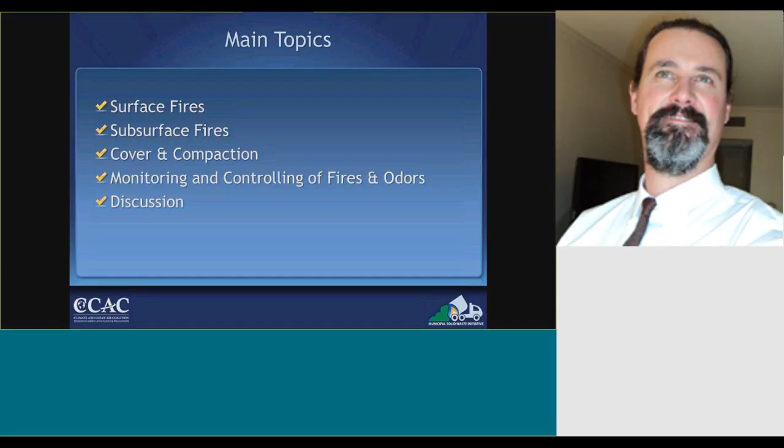With my audience in mind, most of you guys from India, the home of yoga, I believe you guys should know, like what the yogis know, that when you talk about fire, the first thing that might come to mind is breath. As we breathe in oxygen, we oxidize it, and that helps our bodies continue to energize and respirate and sustain life. So with that, we could actually start this meeting with a deep breath in and synchronize our breath halfway across the world, which is about as far as anyone can get or hope to get. So thank you guys, and I hope you enjoy our presentation. I believe you can chat questions as they arise, and Nimmi will moderate those, and we can have hopefully a fruitful discussion.

So let's start with the basics here. The original idea was the fire triangle needing three things: oxygen, heat, and fuel. In newer fire science, they teach the fire tetrahedron, which adds the additional information of the chain reaction. What that adds is the idea that if you have the main three elements, oxygen, heat, and fuel, which would normally sustain a fire, you also need the interaction between those three. So if, for example, the fuel was covered with a fire retardant, it would actually prevent the fire reaction even though heat and oxygen were present.

Even more basic than that, we see the picture of a fire on the left, and this is the shape we call these typically, like a teepee fire. But that shape should also remind you of something else, and that something else is the solid waste facility pyramid or large mound. You could think of the sticks as a potential fuel source inside that mound, and the space between the sticks as room for oxygen. So once you add heat, you have all the elements necessary for a good, fast, rapid oxidation, also known as a fire.

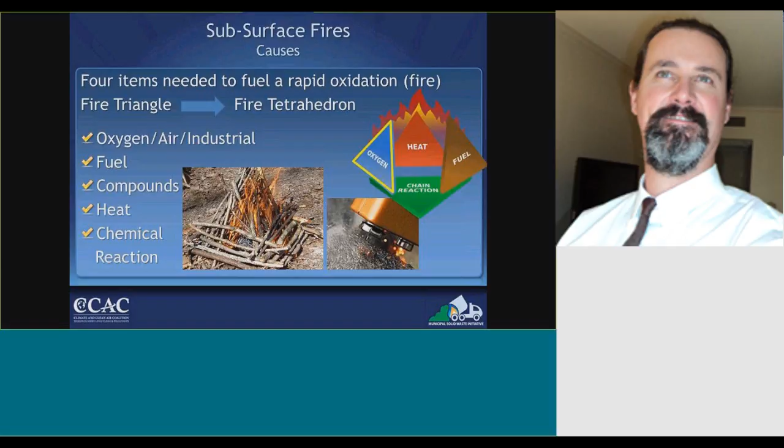Now, what I want you to focus in on is one part of the fire tetrahedron - the main one that we can control is actually oxygen, because fuel is always going to be there. The chain reaction, or potential for the chain reaction, is always going to be there, and the heat will always be there. It's the oxygen portion that we can affect through proper solid waste management.

So there are 2 types of landfill fires, the subsurface and the surface. The subsurface is happening inside the fill and often not noticed at all. But in this case, in the picture on the left, you see physical evidence of combustion. We call that subsurface oxidation, typically out here in the West, also known as SSO. On the right, we have a surface fire.

You can see that potentially one or more of the pieces of refuse that made it to the facility most likely was the source of ignition, or the original heat, and it was enough to start the fire on the surface.

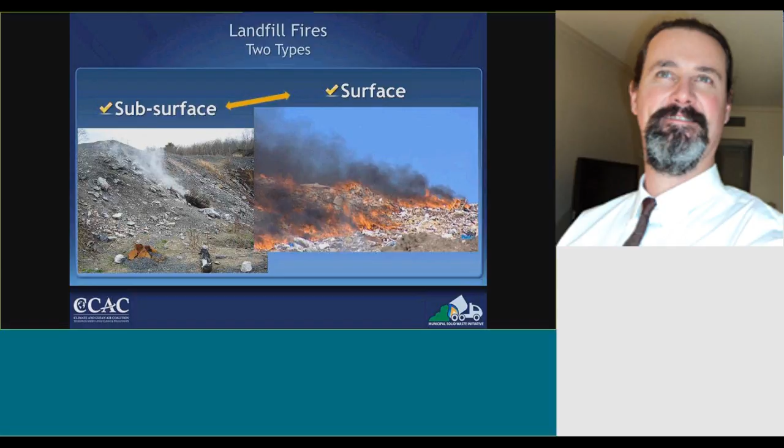Now, what I'd like you to focus on in this slide is the interaction between the two, where a subsurface fire, as you could imagine, could eventually burn to the surface and catch surface material on fire, creating a surface fire. Likewise, the opposite is true - a surface fire can burn voraciously enough to actually heat up the waste mass and find a crack or fissure, a way into the waste mass, and start and ignite a subsurface fire.

Now, as I mentioned in the previous slide, surface fires are usually a result of an offsite source, such as a hot load. That is a term that means a load comes in with, for example, some coals, some embers, perhaps from a barbecue or a cooking fire - little ashes and coals.

Now, it can also be from a piece of equipment. So, for example, maybe some of the customers that come to visit the facility don't have a functioning spark arrestor on their vehicle. Smoking, of course, can be another source.

Waste salvagers or scavengers - we'll talk about that in a little bit - can be another source. Mowers is one that's happened in my experience at a site I used to work on, where every season we'd mow down the grass to create a fire break around the facility, and the mower hit a rock and made a spark and ignited the grass. The grass burned the surface of the landfill, including appurtenances such as the landfill gas system, which is often above ground on the West Coast, and melted the pipes. I have a couple of pictures of that later.

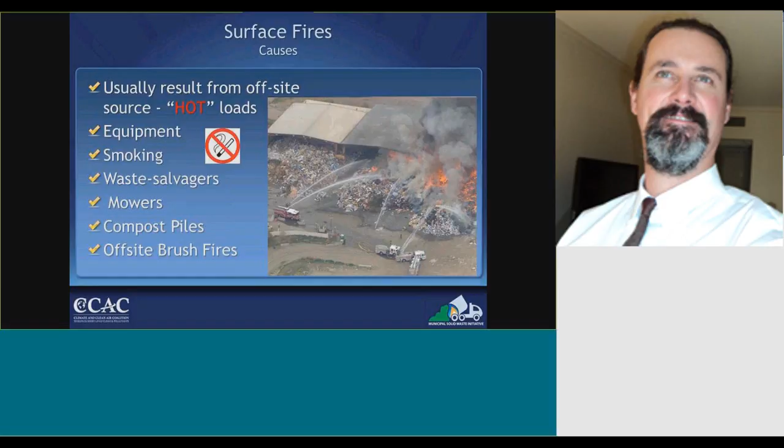Okay, so a little bit more on hot loads. We talked about brush, leaves, construction debris, fireplace coals, burn barrel residue. And then in this slide, I put tires in there as a special waste.

Now, in the States, we actually do not accept tires in the landfill. They're all segregated before the landfill, and either recycled here, or more likely, shipped out of the state, to the tune of about 1,000 tons a day. They're shipped out of state, often to other countries, to use as a fuel source. So we don't have to deal with them in our solid waste facility, but of course other people do.

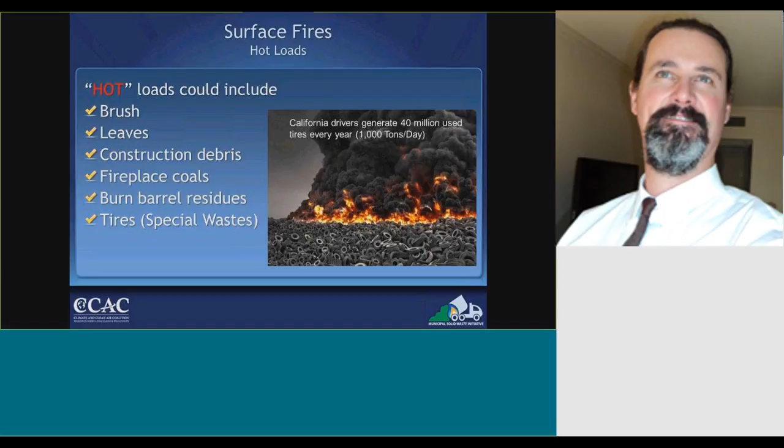On the landfill, we're appreciative that we don't have to deal with tires because, one, they're highly combustible, and two, they're really hard to compact. So once you try to cover them over with dirt, they want to spring back up into full form and create an air pocket. That air pocket can lead to air infiltration into the solid waste mass, which can help set the stage for an SSO, a subsurface oxidation event.

Now, if a hot load arrives at your facility, the first thing you do is not what you might think, start spraying it with water. The first thing you try to do is, one, isolate the load from all other combustible material. Hopefully you have a place to move it to that's away from all the rest of the refuse. And then two, start separating the fire, trying to cut the fire away from the fuel source.

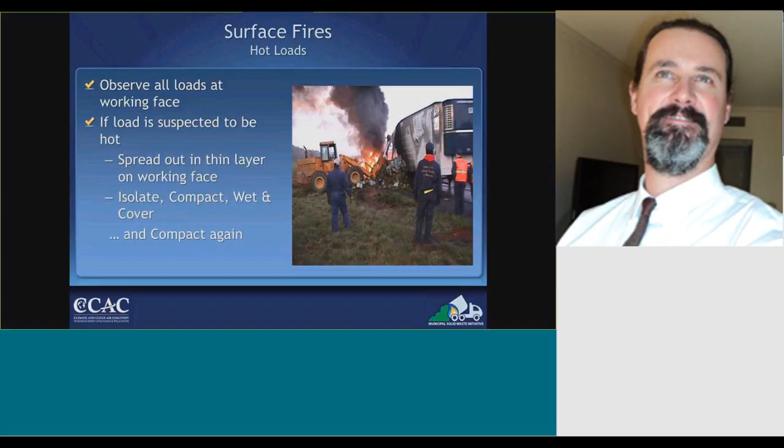Luckily for solid waste facility operators, they have a fair amount of what we call yellow iron, heavy equipment. It's usually just enough to do the job, to separate it out, compact it, and then after the fire's all out, you'll want to wet it, to make sure there's no lasting embers, and compact it and cover it. A theme for this presentation will be compact it again—I'll probably say compaction another 30 times before we're done here in the next 30 minutes.

Now, surface fires can also be equipment related, as mentioned earlier. Here's a good picture illustrating that there's not much compaction going on here. This is a dozer. Dozers are meant to push trash more so than they're meant to compact trash. So it's good to push trash into the right location and then have a specialized waste compactor compact it.

But with all this loose refuse, you can see how it could get up into the equipment, the engine area, exhaust area, high temperature area, and potentially be a source of ignition.

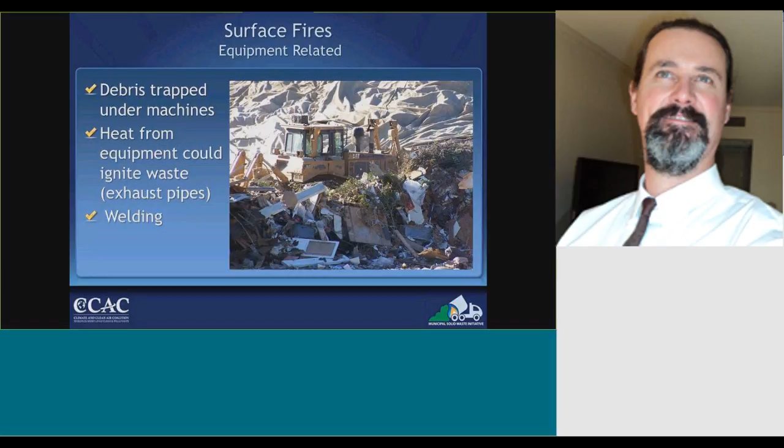Likewise, if you are maintaining your equipment, you might be welding it. Welding is a notorious source of ignition, and usually requires an additional person called a fire watch. You have the welder focusing on the welding, and then a secondary person designated as the fire watch, making sure nothing catches on fire, equipped with proper fire extinguishing equipment in case a fire does arise.

Now, waste pickers and scavengers present a special condition and consideration at facilities because, even in the States here back in the 1960s, this is how it was done. We brought the waste to what we call the table, the area designated for disposal.

And at the table, it would be ignited. All the combustible material would combust, leaving all the metals and salvageable material to be easily sorted through and pushed off to the side for recycling. It wasn't until concerns about air pollution associated with the combustion that we stopped combusting it on site and instead started compacting it and covering it.

You're going to want to control surface fires and limit access to the working face. This is from a fire standpoint, but also from a human health and safety standpoint. The yellow iron, the heavy equipment, is not forgiving and doesn't mix well with a bunch of human traffic on the landfill working face. I guess the only thing people have going for them is that they can sometimes be faster than a slow-moving dozer, but in the midst of debris, it's easy to trip and fall and not be seen by the equipment operators.

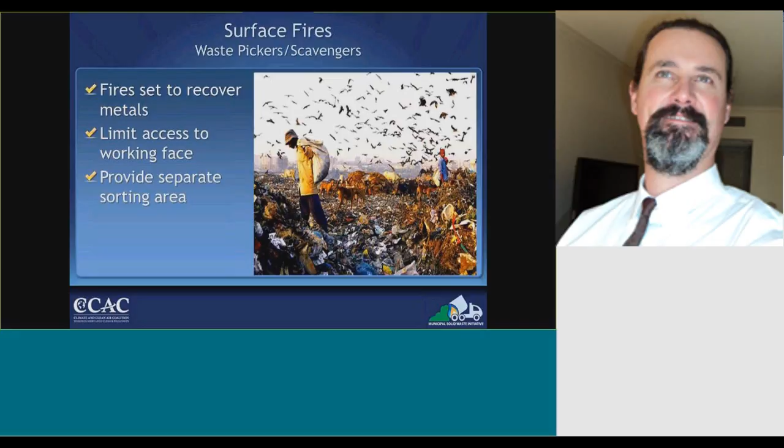Okay, so subsurface fires now. We talked about surface, and now we're going to go down subsurface. Typically, as I mentioned, this results from air infiltration into the waste mass. And when you see the word air, you should also be thinking oxygen.

When a fire is below the surface, it's much more difficult to extinguish. With a surface fire, you can actually see the flames, see the fuel, and have a more logical method to extinguish it. But as soon as it's in this pile of dirt and concrete mixed with lumber and construction debris, it's much more difficult to extinguish.

So you need to know the signs of an SSO, a subsurface oxidation event. We'll talk about those in the following slides.

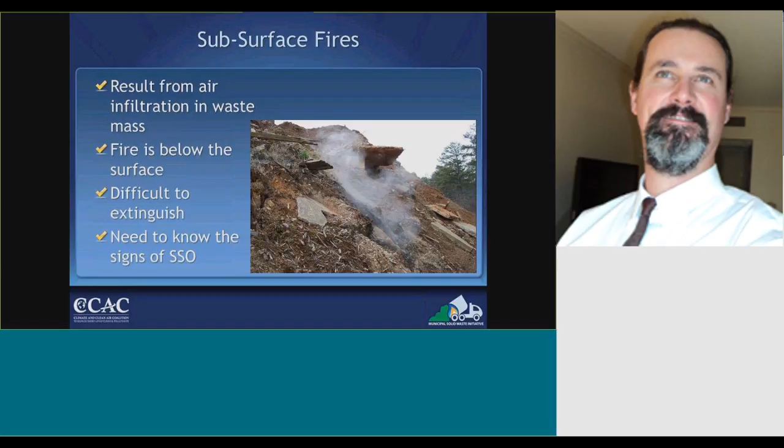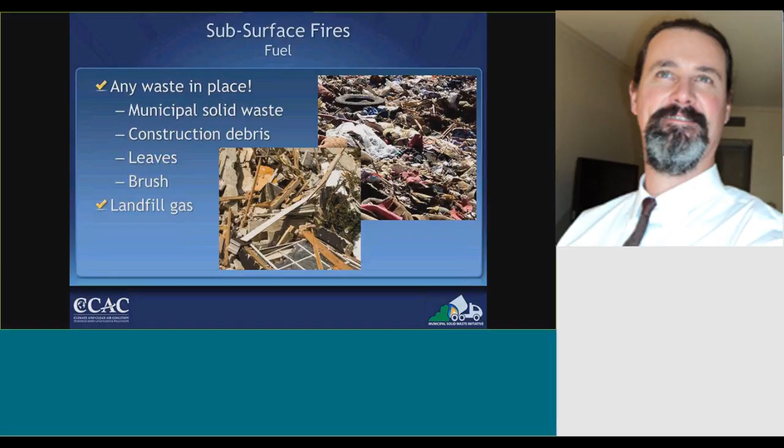Now we need to add another thing here, which is not just the solid fuel like wood. Landfill gas can serve as a fuel, as the organic material with carbon in it breaks down. It's going to produce methane, and it only does it under certain circumstances, which is anaerobic decomposition, without air. We'll talk about that a little more as well.

Heat - this is how we step into it, because we said the heat's already present. Well, how did it get there? If you're landfilling in the winter when it's cool, how does the waste heat up? Well, anything with carbon in it is going to be subject to microbial activity, and you have these different microbe populations that stratify themselves into thriving in different conditions. One of the conditions is temperature.

Psychrophilic, mesophilic, and thermophilic are microbe populations that stratify themselves associated with temperature. But there's another stratification - we won't go into too much detail - but it's aerobic, microbes that thrive in the presence of air, and anaerobic, microbes that thrive in the absence of oxygen. And it's those anaerobic bacteria, anaerobic microbes, that produce the methane.

The natural state of a solid waste mass, where it is compacted, pushes out the air. The natural state is to promote anaerobic decomposition. The reason why we as landfill operators and scientists like to favor and proliferate anaerobic decomposition is, one, they don't get quite as hot as aerobic, the air-loving bacteria, so they're not producing as much heat. And two, they produce a valuable fuel: landfill gas.

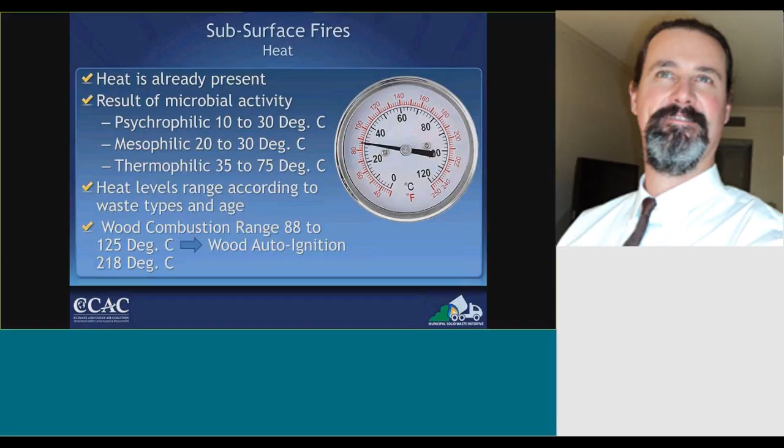Okay, so to the air. This is, as we remember in the fire tetrahedron, the oxygen is the primary part of the fire tetrahedron that we can control.

Now, the picture on the right is actually a well casing, a landfill gas well casing. A hole was drilled into the landfill, and a pipe, a PVC casing in this instance, was dropped down maybe 100 to up to 300 feet into the landfill, surrounded by gravel.

You can see here that things didn't quite go right because there's a void right next to it. Those voids can happen from natural settlement, but they can also happen, as we'll see in the subsequent slide, because once you start pulling the landfill gas out too aggressively, you actually end up pulling atmosphere into the landfill, including oxygen, potentially starting a heat reaction, and that can result in an SSO event.

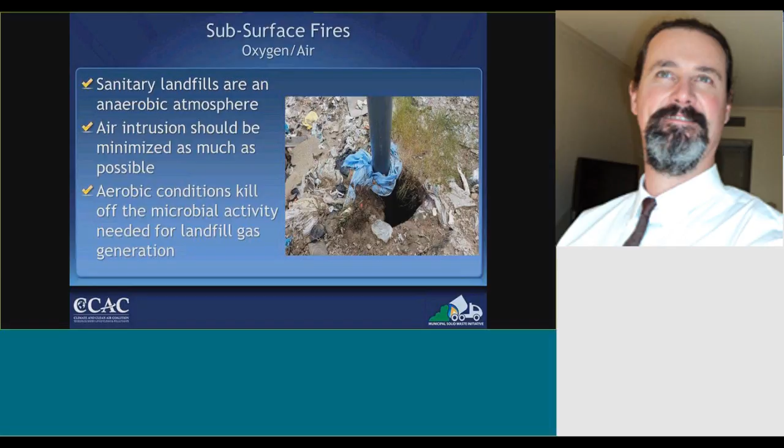Okay, so here's a diagram to help describe this. Now, you see a well here, as I just described, but you can also think of this as void space. The well can represent a landfill gas extraction well, but even a site without any landfill gas extraction wells can have void spaces, especially when the compaction density isn't very high.

This illustrates what can happen with oxygen in the landfill, caused from extraction of landfill gas. Normal extraction: put some vacuum on the well, start pulling out your gas. It's up at the top, hopefully you can see it: 1 inch of vacuum, 5 CFM of flow, and 57% methane, 0 oxygen, and zero balance gas, which is actually a term for nitrogen for all practical purposes.

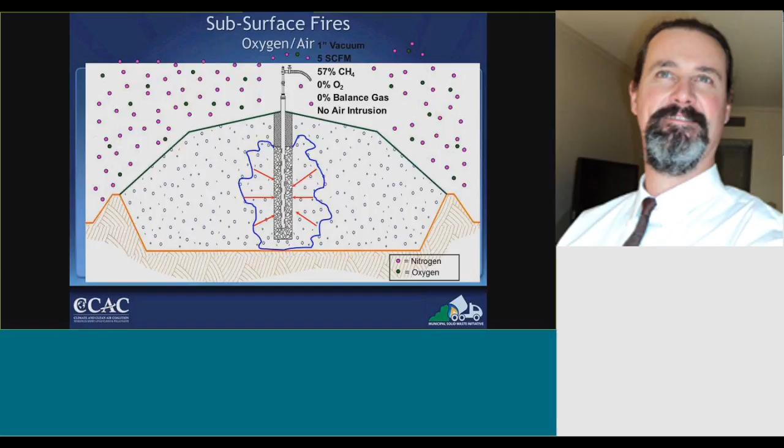And that's what you would expect. There's methane in there due to anaerobic decomposition, which produces methane and CO2. You pull a little more, and you can see the radius of influence push out away from the well, but you can see the flow increasing and the methane still stable. Basically, the gas composition stays the same.

It's not until you keep pulling so much CFM that the radius of influence goes outside of the waste mass. That can happen on the sides, but more likely it's going to happen right at the top of the casing of the well. At that point, you can see the methane starts dropping, the oxygen starts climbing, and the balance gas, or nitrogen, starts climbing as well.

Now, this is when you're measuring what's inside the landfill through a sample port. This is what you'd be looking for as evidence of overpulling, which is going to start reducing the anaerobic bacteria and allowing the aerobic bacteria to thrive more, creating more heat and increasing the risk of an SSO.

Now, one thing to know: if you think about chemistry, aerobic bacteria consume oxygen. So as you start pulling in oxygen, it actually takes a while for oxygen to show up at all. The first thing you're going to see is the balance gas. The reason is because nitrogen is an inert gas, so when it gets pulled into the landfill, nothing eats or consumes it. It just passes through. So balance gas, or nitrogen, is actually the first gas constituent that changes to give you an indication of overpull.

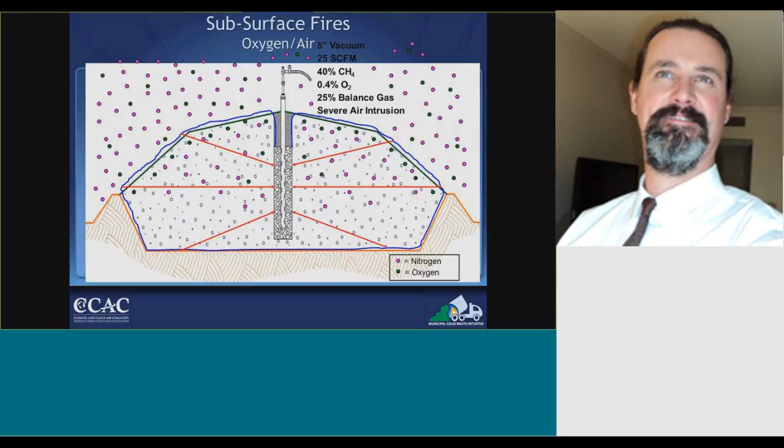Now, as far as fires go, once something starts, it creates an avenue, a channel through the waste mass. If you think of the mountain as the waste mass and the fire as a line creating an avenue somehow through that waste mass, against many odds due to compaction -- but say you had a part of the waste mass sheared off, sloughed off, it's going to create a nice channel, a fissure, a crack that could function as a channel for oxygen to go from the bottom of the fill to the top of the fill.

And it's driven by the thermal gradient of the SSO, subsurface oxidation event, or fire. We actually really stay away from the fire word in the States -- we always say SSO, it's an industry thing. But that's how you can see it start driving and continuing the growth of the SSO.

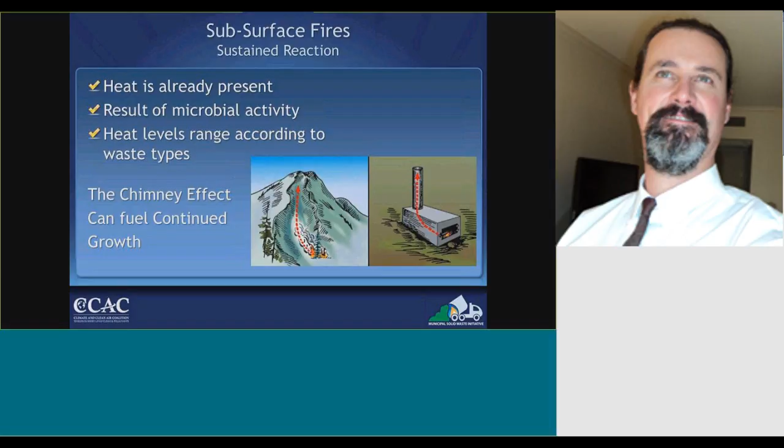But remember, thinking more about decomposition, those microbes -- anaerobic and aerobic -- need a certain amount of moisture to really kick into gear. Potentially, the depression is going to funnel more moisture into this SSO area, which could actually drive the reaction.

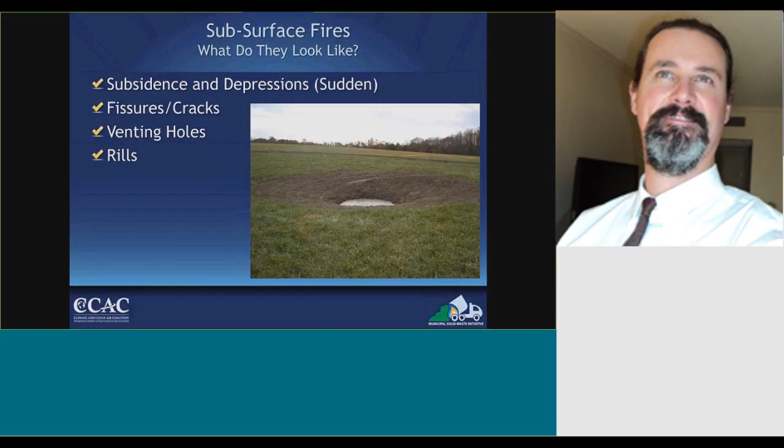Cracking, especially rapid cracking and rapid settlement, could be a sign that you're looking for of an SSO. But also, you could think of geotechnical instability and potentially shearing of the waste mass. These are big signs where you'd be thinking, well, I need to get some heavy equipment, some yellow iron on here, and get this recompacted the best we can.

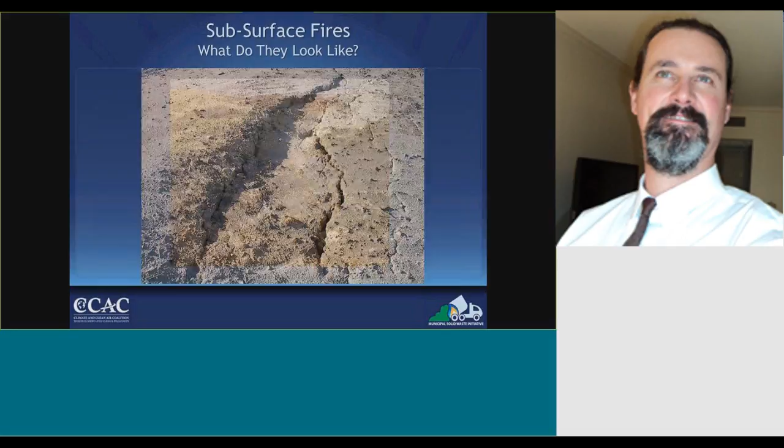This one's pretty obvious, right? Because unlike the previous two, now you've got real physical signs, where there's smoke, as they say, there's often fire.

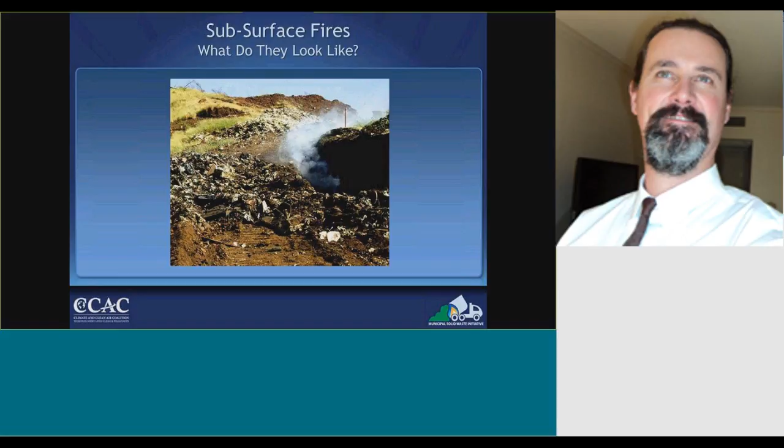In this slide, the one thing I'd note is if you see all these metal casings, as if maybe they were structural piers for some type of structure, maybe the idea was to build on top of them. This kind of reminds me of a vertical landfill gas extraction well, where hammering these caissons in could actually create a space, an avenue, putting holes in the waste mass, which could allow oxygen to enter into the fill.

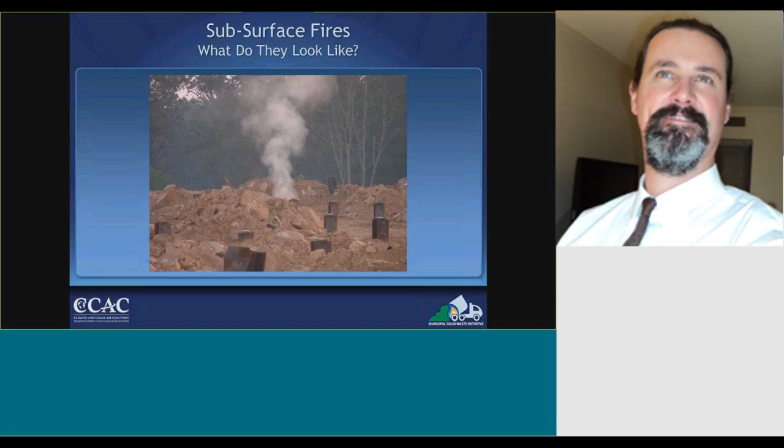If you see a crack, that's one thing. If you see a crack with steam coming out, that's another thing. If you just see a crack with actual residue around it, that could be a sign that it's a little more than steam. It actually could be bringing up partial combustion products like smoke and staining the cover.

Okay, so now we get to move on to prevention and control and monitoring.

And Nimmi, if you have any burning questions out there, we can always field those as well. No pun intended. Actually, there's actually a very relevant question just as you're going into this, David.

So there's a question: this type of condition and problem exists in every country. So if it's so dangerous, how do you manage the different types of solid waste without fires? But I think that's where you're getting into right now, as to how to manage it and avoid fires. Am I right?

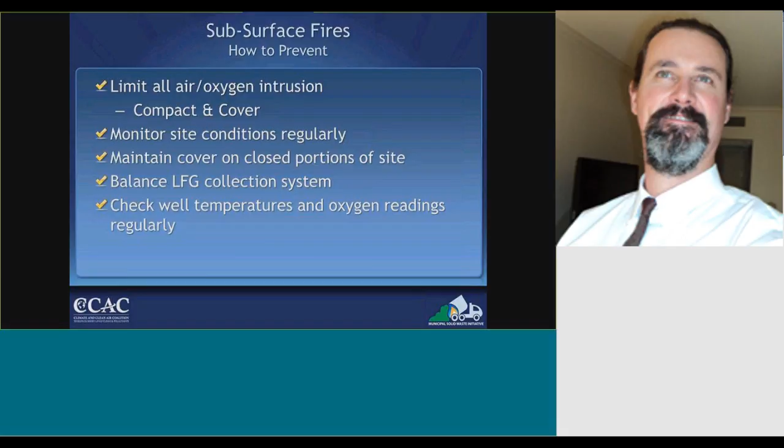Okay, cover. Now, here's my take-home point. I've seen a few slides where it seems like the site is really cover-rich. They're using cover, but it doesn't seem like they're compacting. And they really go hand in hand.

Compaction is number one. Even if I had to choose, I would be choosing compaction over cover. The reason is because I'd be pushing all the air out, smashing things flat and not leaving air voids, and that alone reduces the ability for fire to spread. It's actually pretty darn hard for a fire to spread on a well compacted face. And also, once that's done, it makes it a lot easier to apply cover, and you use a lot less.

And as you can imagine, if you don't compact, and then as soon as you put dirt on it, the cover's just going to sift through the waste, and you'll lose all your cover down in the waste.

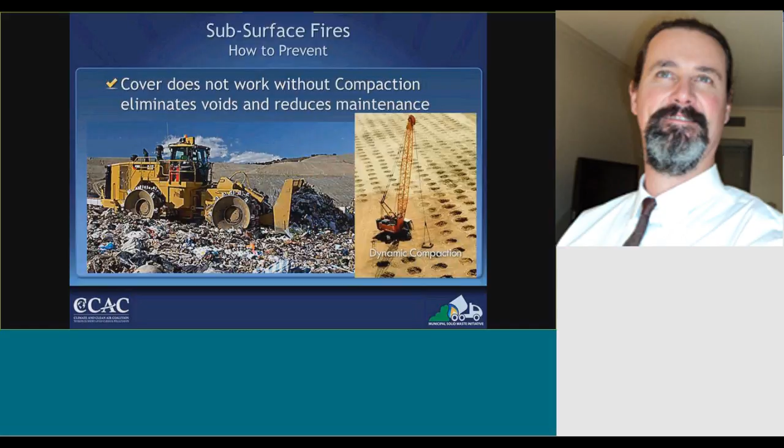So daily cover - in addition to fire control - daily cover does wonders for your short-term and your long-term operation. It reduces odors, controls vectors and rodents, reduces stormwater infiltration, and reduces litter. We can talk about that more as we go if you have questions on it.

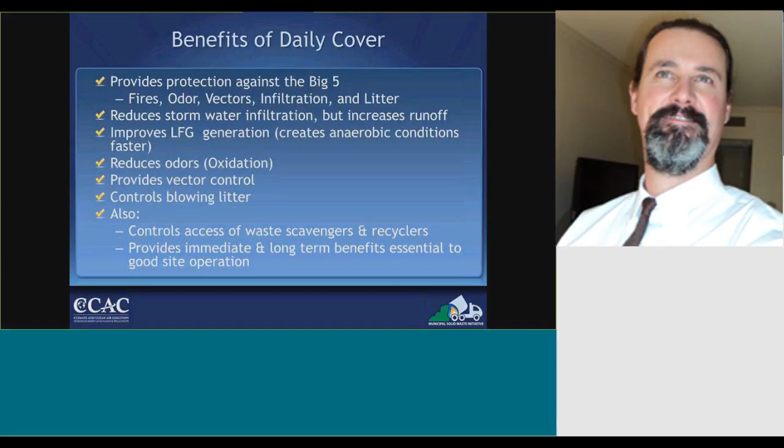I'll speed it up here. And of course the cover can also help control unregulated or unmanaged scavenging and recycling, and then of course help not only the immediate stuff, but the long-term solid waste maintenance, improve that as well.

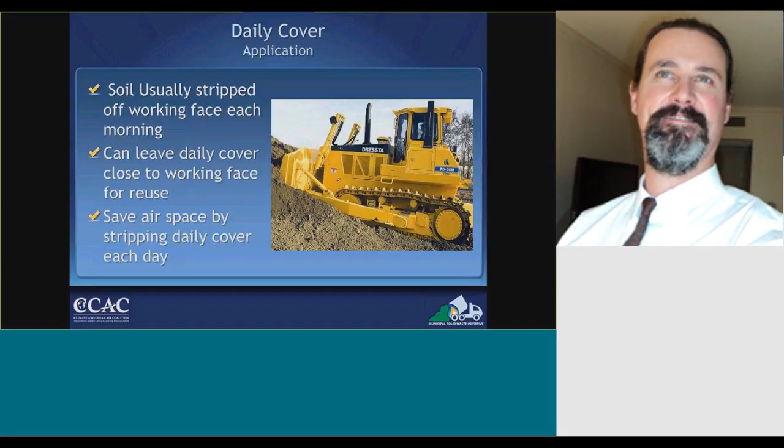And once you put it on, sometimes you can strip it off, and that can save airspace. And you can use, if you have a good stockpile of soil, you could use that. Typically they'll use a scraper to haul it.

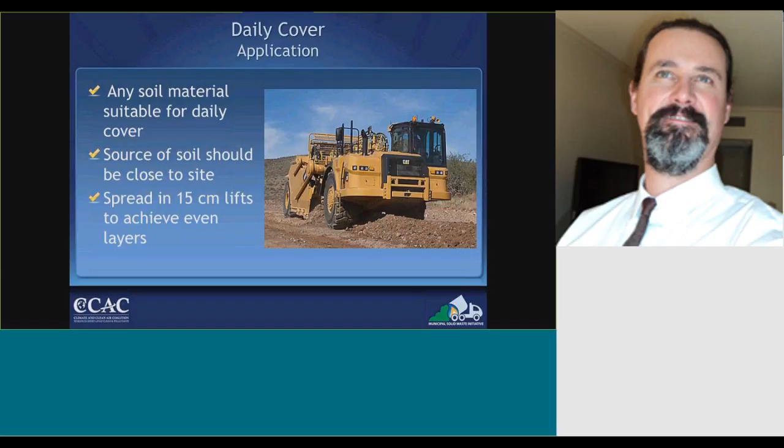The 15-centimeter lifts, about 6 inches, help reduce stormwater, but it's also typically measured as the minimum thickness to prevent insect larvae from crawling through and hatching out into the environment.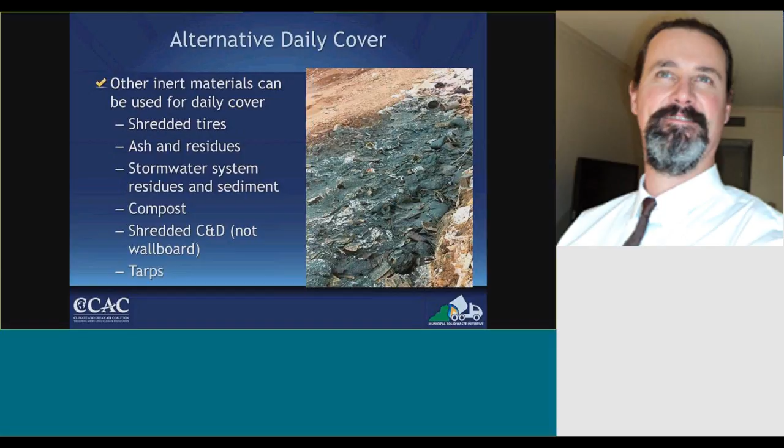But you don't have to just use soil, you can use a whole bunch of stuff. Shredded tires, however, the caution could be that they might be more prone to surface fire. Ash and residue, great, those can be a great source of cover, though you could have a hazard associated with dust, so you got to be careful there. Shredded C&D, but not wallboard, because it has a whole bunch of sulfur that can lead to hydrogen sulfide, which can lead to odors. But most popular often is tarps - we saw a picture earlier, it's just a thin tarp.

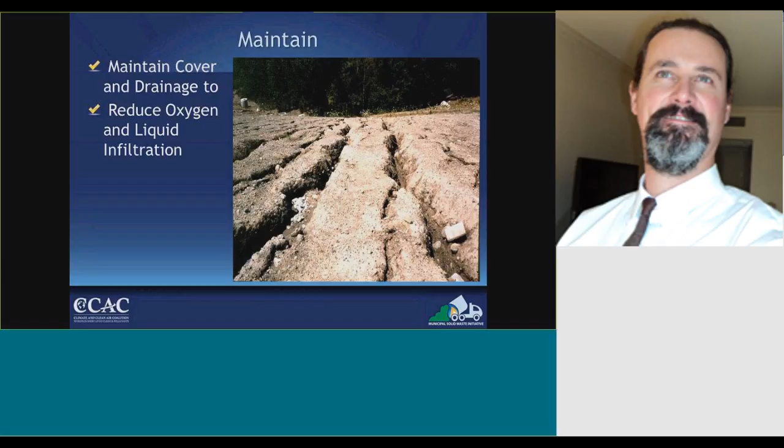Once you have your cover, you're going to have to maintain it over the long haul, and that helps reduce oxygen and reduce liquid infiltration. And as you manage, you've got to always think safety first.

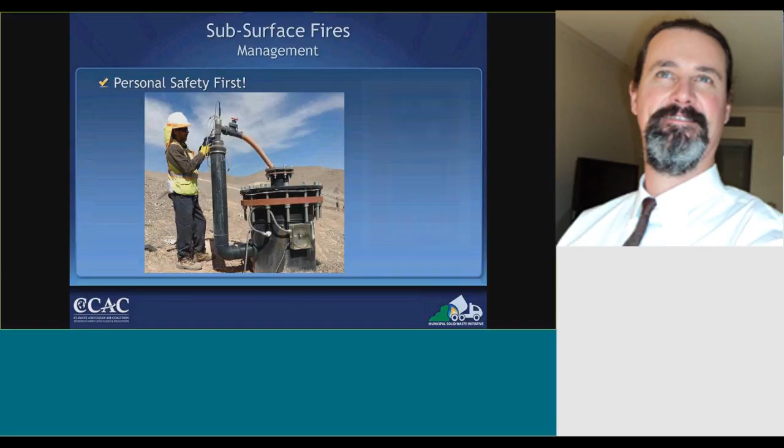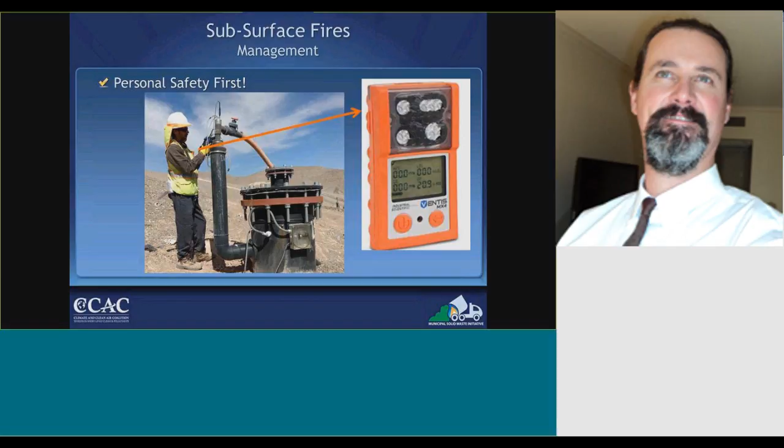Here's one of the SCS engineer field technicians out at a site in Nevada, monitoring a well. Right on his shirt pocket he has this 4-gas meter, measuring H2S, which is toxic and flammable, carbon monoxide, which is toxic, the LEL, lower explosive limit for methane, and oxygen. It's a nice little tool, costs about $600, and can be used when you're out there monitoring. It can keep you safe and keep your team safe.

And then confirming a carbon fire through carbon monoxide testing, which can be done relatively inexpensively. The previous picture showed our technician with a gas emission monitor that monitors all this stuff, and he can make about 60 readings a day measuring all these things - it's not something you have to take out to a laboratory. You get the ability to identify oxygen sources and then cut off the oxygen supply, typically through compaction.

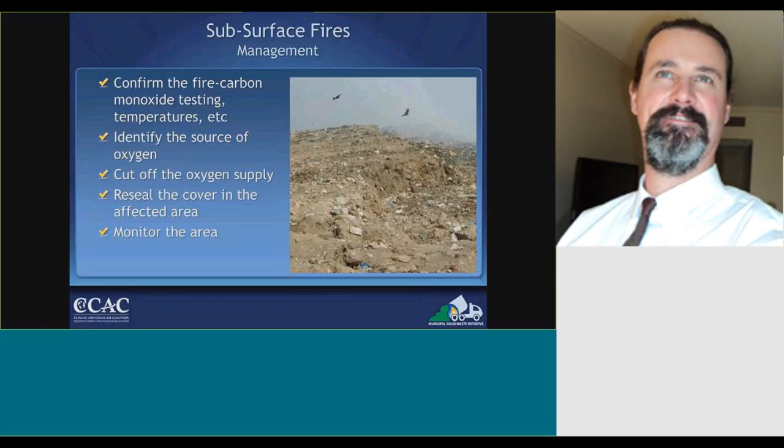More management pictures - on the left, there was probably a combination of a surface fire and a subsurface fire. You're going to need to apply water to manage surface fires typically, but you don't necessarily expect it to control subsurface fires, because the water's not getting there - it's going to evaporate long before it gets deep into the waste mass, and any moisture that does get there probably is just going to help accelerate decomposition and potentially heat.

On the right, the heavy equipment, yellow iron, might just get out there and dig it out. I know that can be hazardous, and you might need several pieces of equipment, but that's digging it out, getting to the source, and compacting it, recompacting it as you go.

Some folks will be doing direct push probes, a geotechnical push probe into the waste using a lot of force, and then pushing in liquid carbon dioxide to cool it and remove the oxygen.

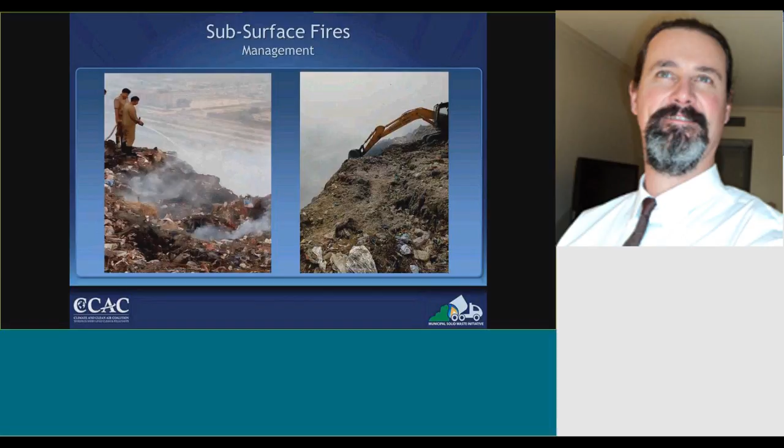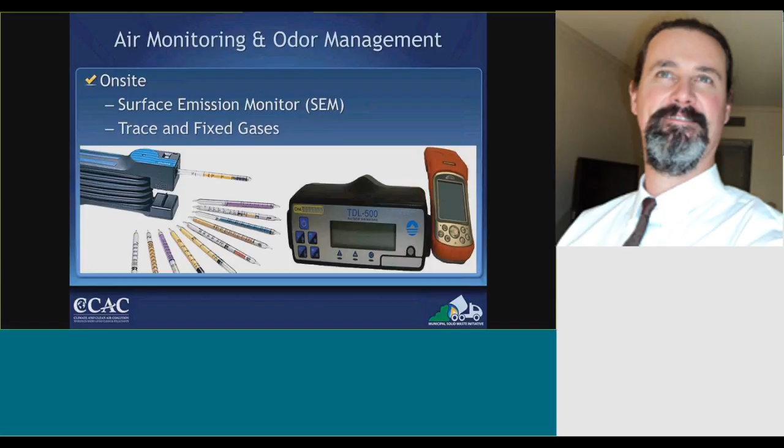Here's a shot of some monitoring equipment, the Draeger tube - these are like $15, or about 1,000 rupees per tube - and then a tunable diode laser, which we really like because you don't have to calibrate it on site, and it measures not only down to the part per million for methane, but also up to 100%, so full scale, low level detection to high level detection.

Temperature can be pretty easily accessed through a temperature thermometer, and these non-contact laser thermometers are relatively inexpensive. If you want to get fancy, you can do thermal imaging - they have planes with a thermal imaging camera that fly over and can detect hot spots on your facility.

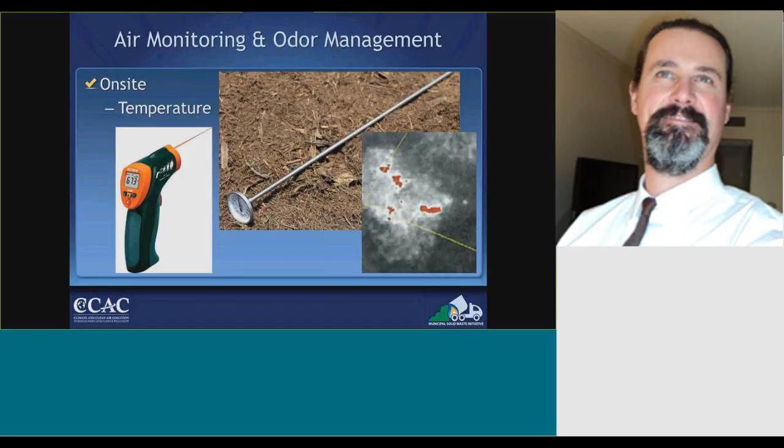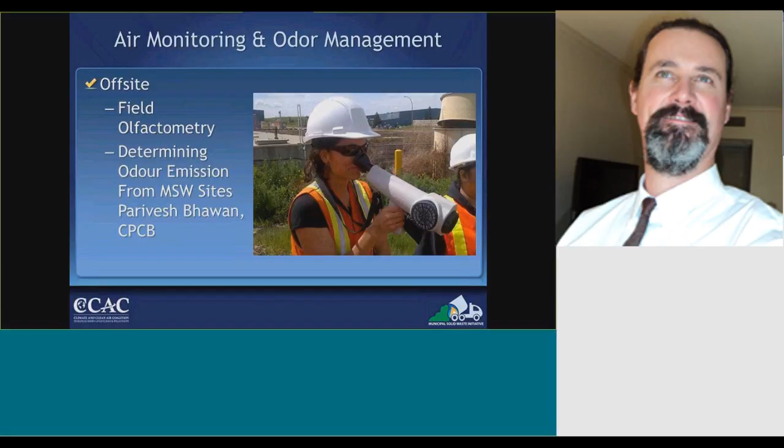And with that, you're going to want to keep track of your meteorological data - your wind, your temperature, wind direction, rainfall - and you can also take grab samples and send those off-site for additional analysis. And that takes me to the end.